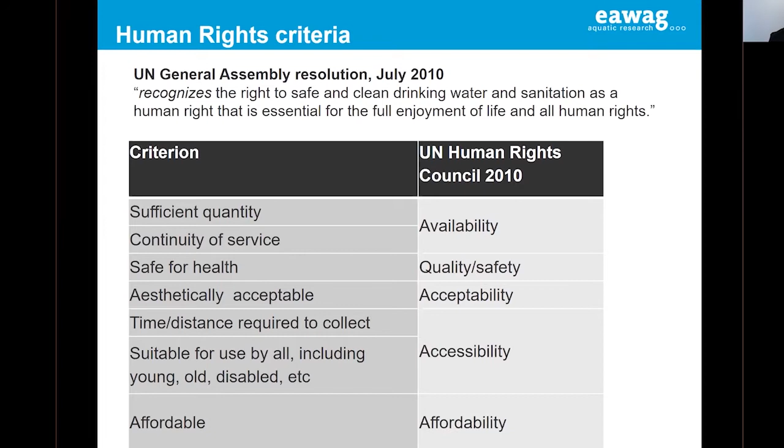The time and the distance required to collect the water have to be adequate. And water has to be accessible also for young people, old people, and disabled people. Last but not least, the price of the water has to be affordable. Those goals are expressed in Sustainable Development Goal 6.1. They claim that by the year 2030, everyone should achieve universal and equitable access to safe and affordable drinking water. This is measured by the indicator of the proportion of the population using safely managed drinking water.

And what does safely managed drinking water mean? This is drinking water from an improved source that is located on the premises, that means in a household compound. It should be available when needed and it should be free from fecal and priority chemical contamination.

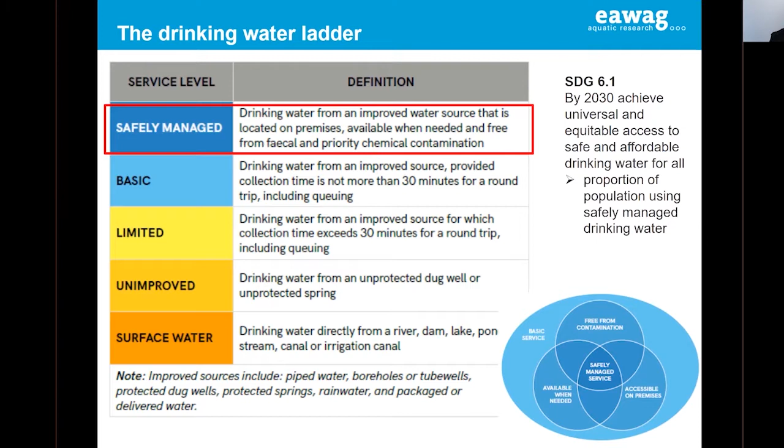The accessibility of water, the distance to the water source, is very crucial because the larger the distance to the source, the less water is being collected. And this has an impact on hygiene because if less water is available, fewer hygienic practices are practiced, which again has an impact on health. Also, the distance to the water source has a strong impact on the health and on the workload of women, usually the ones responsible for collecting and carrying the water. Also, studies have shown that the farther away the source is, the higher the recontamination risk for the water that is being collected at the source.

Diarrhea reduction is associated with an improved drinking water service. While for unimproved water, we cannot expect any reduction of diarrheal diseases, improved water shows that we can reduce diarrhea by about 11%. If improved water is available near the households, in household compounds, we can reduce diarrheal diseases by about 23%. If the water is treated at the household level and if there are safe storage practices, considerable diarrhea reductions can be achieved, up to 48%. If well-managed piped water is delivered into the house, this has an even larger impact on health. Then diarrheal diseases can be reduced by about 75%.

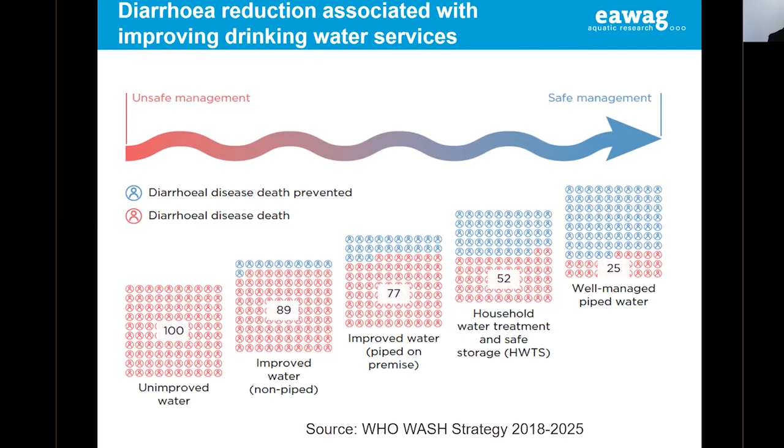I will now present you a video about a water kiosk in Uganda.

More than 1 in 6 people worldwide lack adequate access to clean drinking water. This problem is especially acute in low and middle income countries like Uganda. Currently in Uganda, about 30% of the urban population and 40% of the people in rural areas do not have access to an adequate source of drinking water. In eastern Uganda, there are many groundwater wells in the area, but their water has a high saline content and cannot be used for drinking water. So people are not able to have access to more or less safe water from the ground.

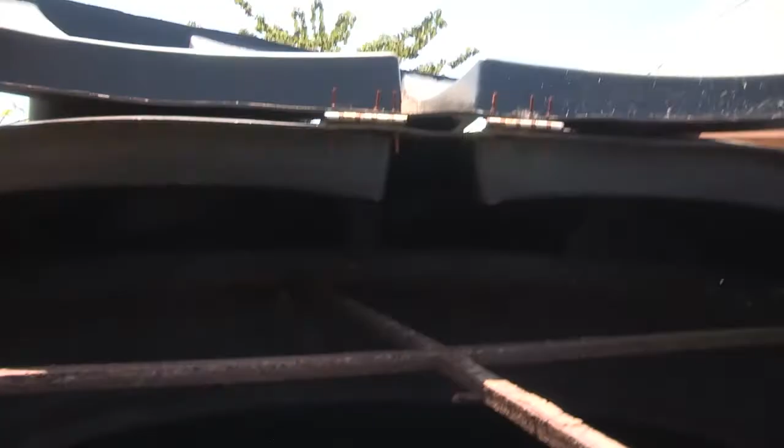So what people do in these times, they just go down to the lake. The majority of people in eastern Uganda get their drinking water from Lake Victoria, which is highly turbid and contaminated. In the past 8 years, scientists at Eawag have developed an innovative technology for water treatment, the gravity-driven membrane filtration.

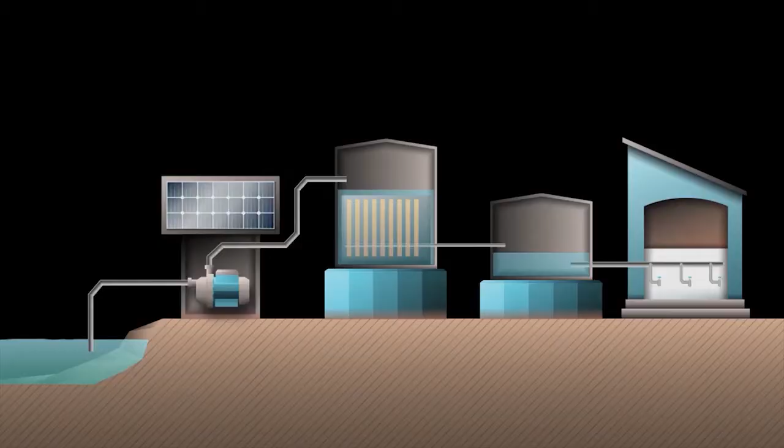We started with the installation of GDM water kiosks in Uganda in 2014. Right now we have established 5 kiosks in Bulwande, Busime, Lugala, Bulundira and Bumeru. The difference between lake water and kiosk water is absolutely immense. And basically the key technology, which is the membrane filtration, is removing particles and it's removing turbidity from the water. This immediately improves the aesthetic quality, so the visual quality of the water.

More importantly, the membranes remove pathogens or microbial contaminants which are in the water. You can think here of protozoa, pathogenic bacteria, worm eggs, anything like this. This is removed. What this does is immediately improve the safety and the hygienic quality of the water, and that gives you a good end water quality at the kiosk.

Each of the kiosks treats about 6,000 liters of water per day, and we serve the schools in those areas as well as the local community. Before this water project came, there were many cases of diarrhea and cholera among other diseases in the communities. But now, the consumption of untreated water from the lake decreased in these locations from 73% to 41%. 59% of the households use the kiosk water.

The incidence of diarrhea among adults has dropped from 19% at the project start to 6%. And among children under the age of 5, it has reduced from 34% to 14%. The incidences of diarrhea and cholera have been reduced. Enhancing access to safe water unlocks opportunities for people by reducing their workload and improving health. The establishment of the GDM water treatment systems at the shore of Lake Victoria is an example of how putting scientific innovation into practice can improve the lives of communities in great need.

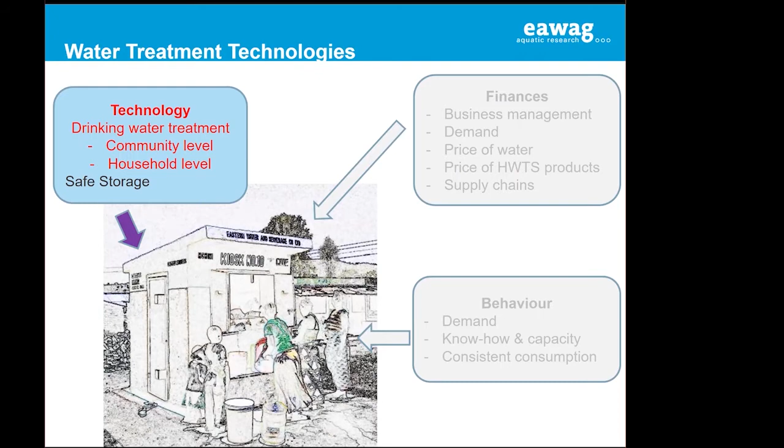So in this chapter, we are going to look at different technologies for drinking water treatment, either at the community level or at the household level. At very different levels, water treatments are possible. There are large-scale centralized systems, usually in urban centers or in peri-urban centers, where a large number of people are supplied by the water. Because risks are very high if there is some contamination in the water and a lot of people are being impacted, there are very high and stringent quality requirements for the water treated.

So the systems being implemented in large-scale centralized systems are usually quite complex technically, and they require quite high cost for investment and operation. Also, because these systems are quite complex, the operation and maintenance procedures are also quite demanding. Usually the responsibility for large-scale systems is with the government or with private companies. Water treatment is also possible at the community level, more in a decentralized manner, and examples for such community-level water treatments are water treatment kiosks.

Here, the systems are usually a bit less complex. Also, a lower number of people are being supplied with the water, and because the systems are less complex, operation and maintenance is easier, and also the costs for the installation of the technologies are lower. Usually these systems are operated by the community, and therefore there is quite a large challenge for establishing the capacity for the community to operate these systems technically.

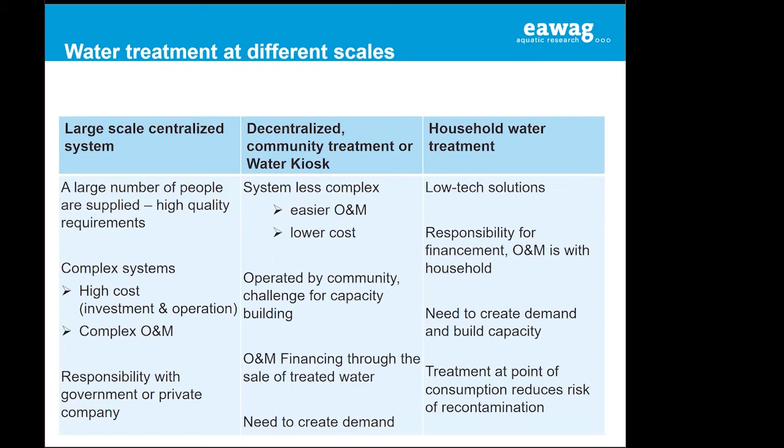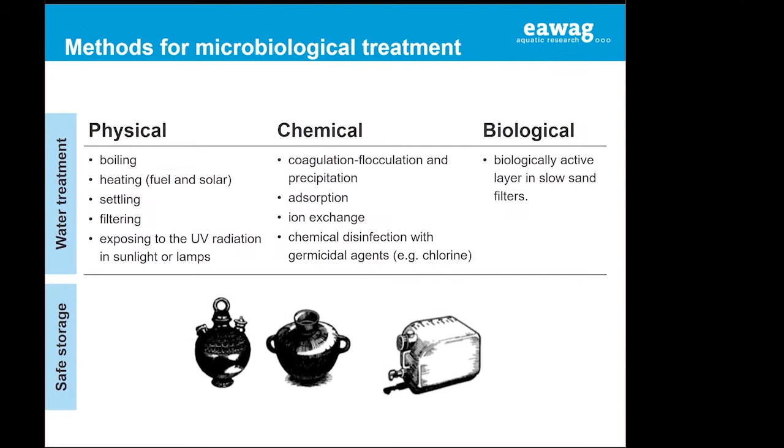As many water treatment technologies are being challenged by turbidity, it's important that turbidity is being removed before water disinfection technologies are being implemented. Why is turbidity challenging water treatments? Turbidity uses up chemical disinfectants dissolved in the water. It causes the premature clogging of filters. It blocks UV radiation and it stimulates bacterial growth. Different methods are being used to reduce turbidity in the water.

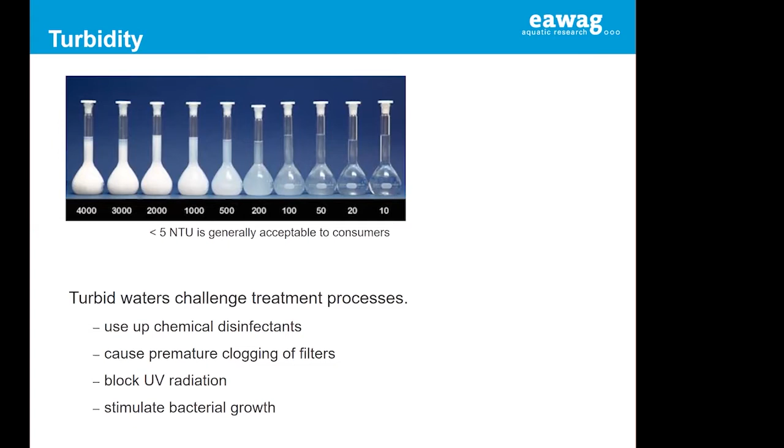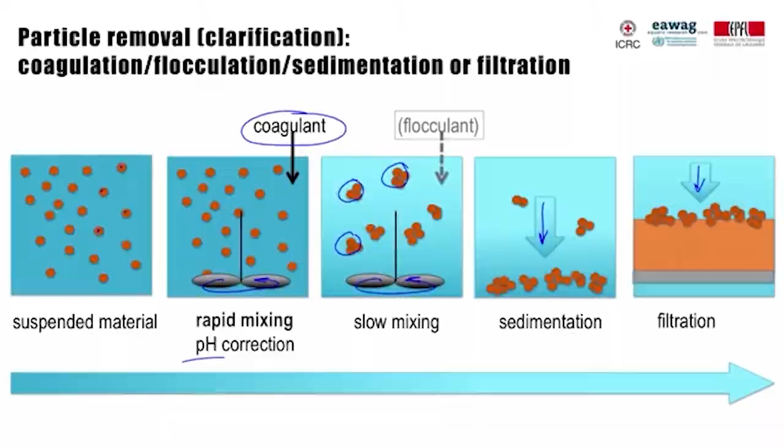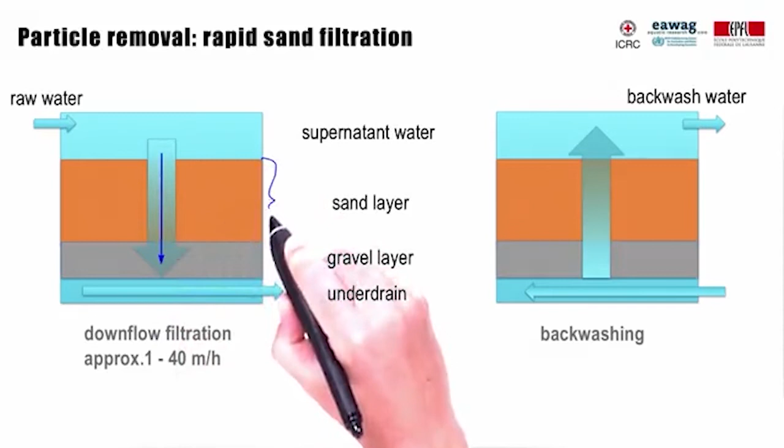Another method of reducing particulate matter content is rapid sand filtration. Water passes through the filter media, which is coarse or medium-sized sand, loaded over the more coarse gravel layer. During filtration, solids get trapped, settle or adsorb onto the sand material. After trapped material accumulates in the first layers, the filter requires backwashing, reverse flow of water to remove accumulated material. The filters are operated at a linear velocity of 1 to 40 meters per hour, which is considerably higher than in slow sand filters, which we discuss later.

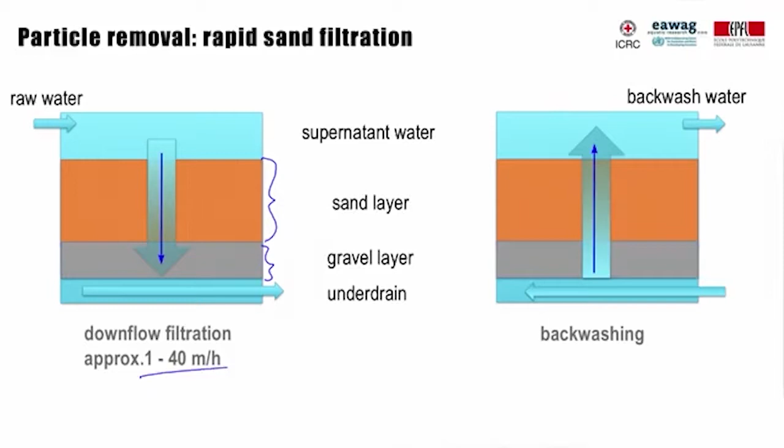For rather turbid waters, roughing filters can be used prior to rapid or slow sand filtration or disinfection. Differently sized coarse material is used in roughing filters. The size decreases in the direction of flow. There are different configurations of roughing filters: upflow, downflow, or horizontal flow. In an upflow filter you see here, water moves from bottom to top and the retained solids accumulate predominantly in the bottom of the filter. They can be flushed out by reversing the flow or simply draining the filter.

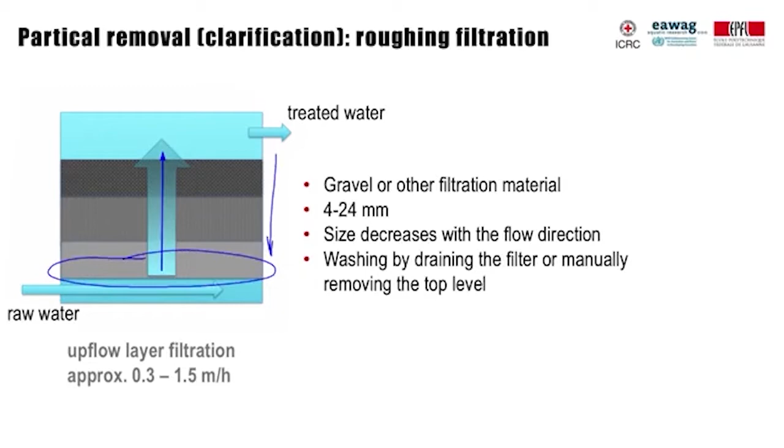Filtration methods are not only available to remove turbidity from the water, but they are also available to remove microbiological or chemical contaminants from the water. One of the options is slow sand filtration, which we will be talking about in the next slides, as well as membrane filtration with different pore sizes, leading to different applications, as well as ceramic filtration, a method which is mainly used at the household level for household water treatment.

Slow sand filters are operated at slow filtration rates of 0.1 to 0.3 meters per hour, compared to rapid sand filters, which are operated at 1 to 40 meters per hour. Slow filtration rates allow development of biological activity within the filter. Thus, slow sand filtration is a combination of different biological and physical processes, including mechanical trapping, adsorption or attachment, predation, and natural death, leading to the reduction of solids but also micro and macroorganisms.

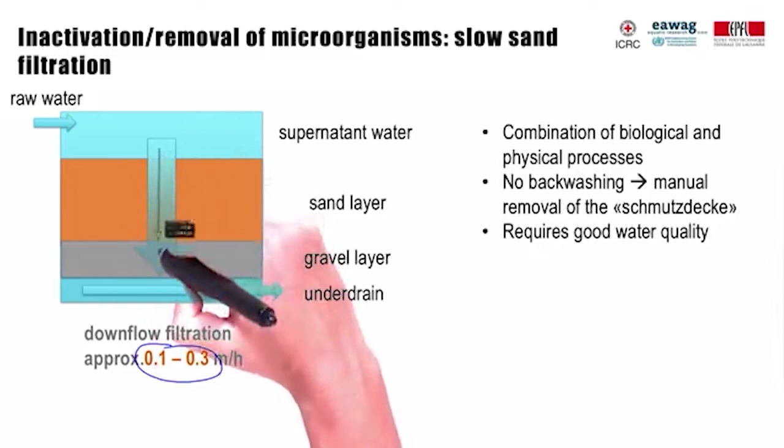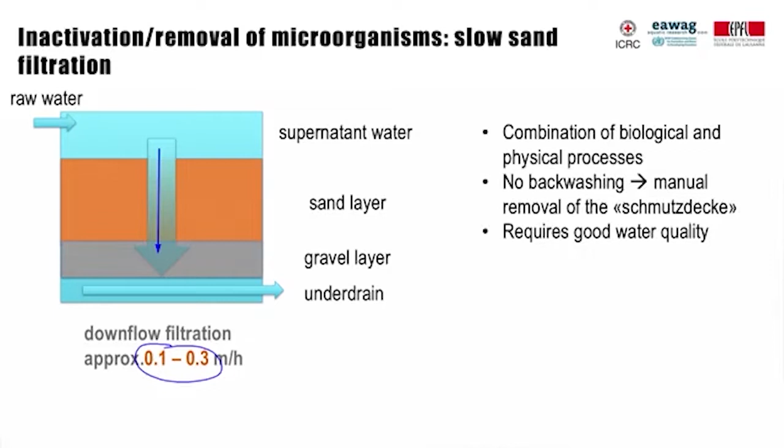Slow sand filters are usually downflow filters and are operated by gravity. Each filter requires a ripening period of a few days to a few weeks until removal rates stabilize. Mainly the top layer of the slow sand filter contains a diverse microbiological community and particles, and it is also called Schmutzdecke. In the Schmutzdecke, predominantly the inactivation of microorganisms occurs.

During membrane filtration, water is driven by the pressure difference between the feed water and filtrate through a filter with pores of a defined size range. Usually polymeric membranes or sometimes ceramic membranes are used. Microfiltration has pores in the size of bacteria or higher and removes them and particulate matter by size exclusion. Ultrafiltration membranes are tighter and also remove viruses, which are in the size of 20 to 80 nanometers.

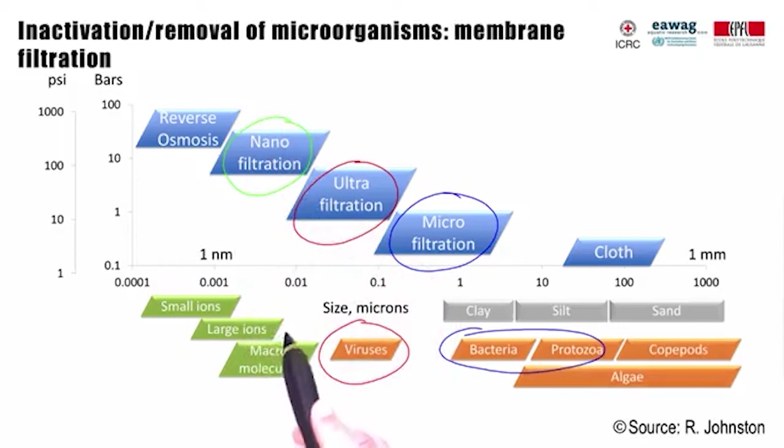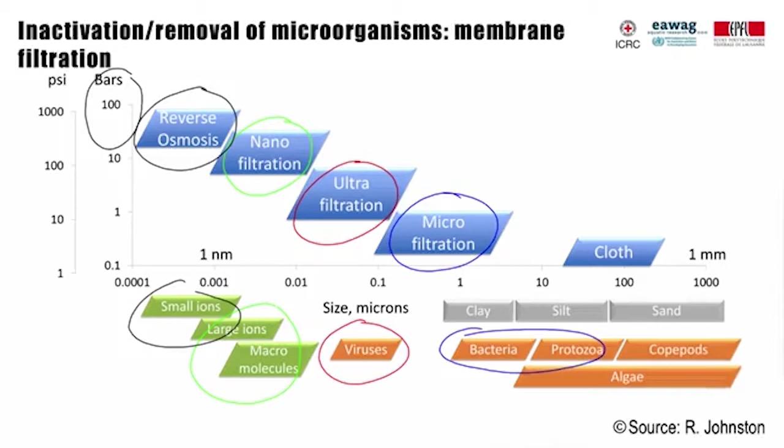Nanofiltration requires considerably higher pressure, as the pores are small, but it is capable of retaining macromolecules and larger ions. Small ions, such as salt ions, can be removed by reverse osmosis, requiring even higher pressure. For disinfection purposes, ultrafiltration membranes are most common as an effective barrier against pathogenic microorganisms, including viruses and particles.

Membranes need to be frequently backwashed to remove larger particles, microorganisms, and all kinds of material accumulating on the surface of the membrane. The layer which is formed on the top of the membrane is called the fouling layer. The drinking water filtration systems offer constant and reliable operation, which however requires a high degree of automation, reliable power supply, and relatively high cost. There are also gravity-driven systems on the market and in development, more suitable for remote applications.

Slow sand filters have the following characteristics. They remove about 1 to 2 log of bacteria and protozoa, but they are also able to remove heavy metals and organic matter. Against viruses, however, they have a limited effectiveness. Advantages of the slow sand filter are, as I mentioned, its removal of organic matter. This is one of the very few water treatment technologies that has the characteristic of removing organic matter.

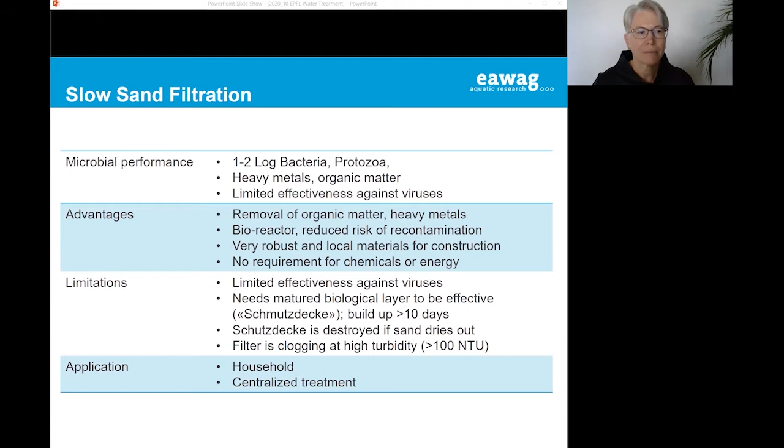Characteristics of membrane filtration, mainly in traditional systems, are that the microbiological performance depends upon the pore size of the membranes, as previously explained. The advantages are that they are highly efficient in removing pathogens, and a lot of water can be treated at once. Also, membrane filters are able to reduce the turbidity of water. But same as with slow sand filters, if water has a very high turbidity, the filters are very quickly clogged. Therefore, turbid water has to be pre-treated.

Limitations are fouling of membranes. That means that the membranes have to be regularly backflushed and they have to be disinfected chemically. So these are complex systems, they are usually very costly, and they have to be imported in areas of low-income countries. Also, supply chains are required for replacement parts. And in the case of reverse osmosis systems, it's difficult to discharge the brine. For all those treatment technologies, recontamination during storage is a risk.

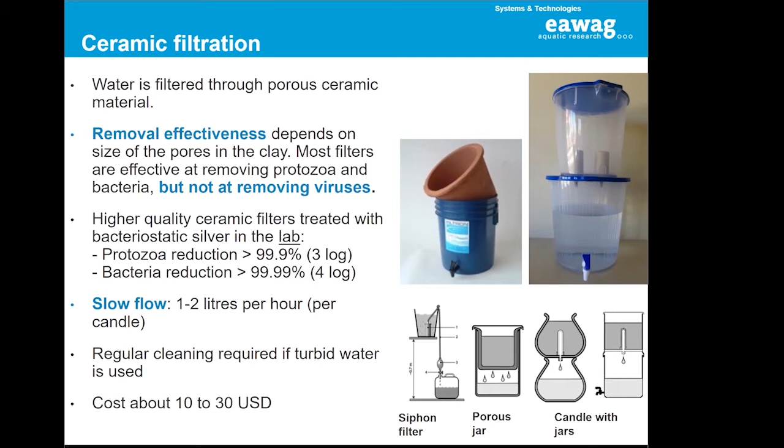Now I would like to introduce you to an example of marketing ceramic filters in Cambodia. This is the Tunsai ceramic filter, which has been developed by the organization Hydrologic Social Enterprise. And as you can see from the picture here, we have two types of filters: the normal filter, the Tunsai filter, and then an improved model, the Super Tunsai filter, with a better design that has some filter stands that enable you to better withdraw the water and put the glass below it. The Tunsai costs $12 and the Super Tunsai costs $22 US.

Now, these filters have been marketed by two different approaches: direct sales and sales through microfinance groups. In the microfinance groups, women had the opportunity to obtain loans, and these loans facilitated the performance of the sales model. So the result of this marketing experiment was that direct sales led to about 16% of households purchasing filters, whereas in the microfinance groups, about 43% of the members purchased a filter.

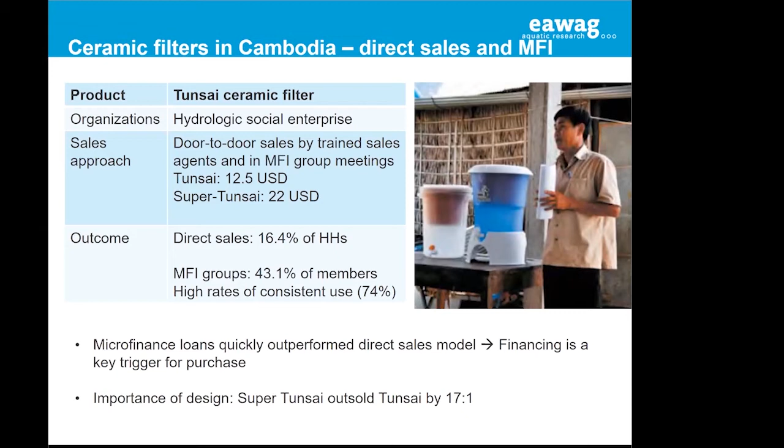So another method for household water treatment is boiling. Boiling is the method which is most broadly applied in low-income countries, especially in Asia. It is a very old method. It has been recommended by health workers for centuries. And of course, boiling is never applied at the centralized scale, only at the household scale.

So the problem with boiling is that it uses a lot of energy. And there have been some calculations that said that the household cost could increase by about 10% only for the cost of boiling the water if additional fuel needs to be used. Also, a problem is if the boiled water is not stored properly, because if it's stored in unclean containers, of course, the boiled water can be recontaminated again.

One of the big advantages of boiling is that it disinfects almost all pathogens. Only very, very few spores, like for example anthrax spores, are resistant to boiling. So boiling is one of the few methods that can be used to disinfect all the pathogens.

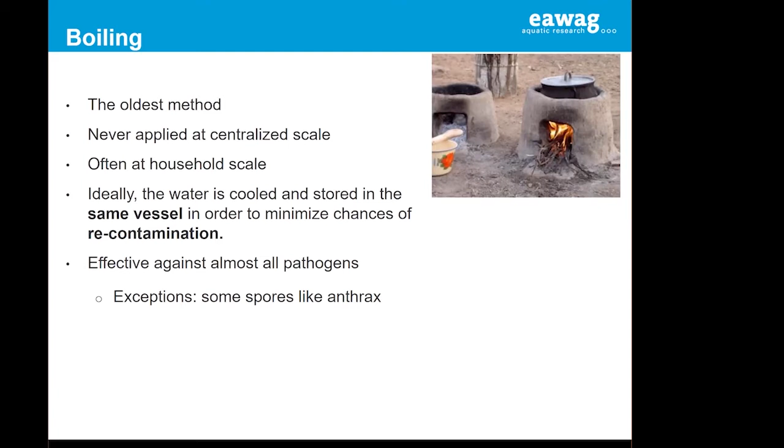Now, a question is, how long should water be boiled for the water to be safe? And here we come to pasteurization, because actually water does not have to be boiled at all to disinfect the water. We can use the pasteurization effect, and heating up the water to 70 degrees Celsius for a few minutes has quasi the same effect as boiling. And this table gives you an indication of the temperature sensitivity of different pathogens.

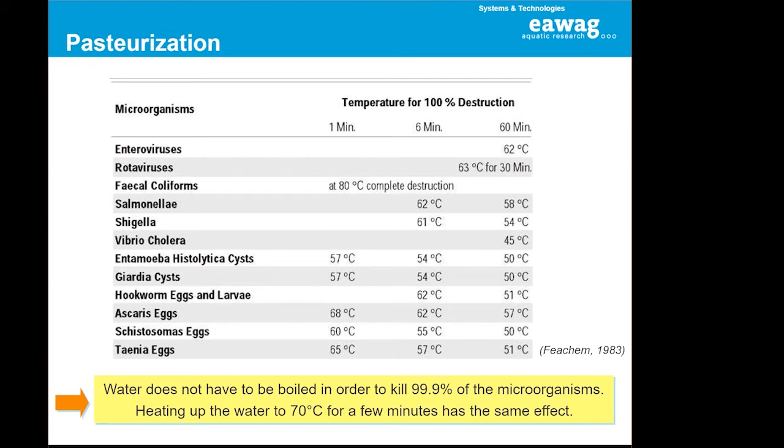So if we summarize the characterization of boiling and pasteurization, we have a high efficiency against different classes of pathogens, and it's a very common technology which can be combined with cooking or with tea boiling. Also, one of the big advantages of boiling is that it's one of the few technologies that can be used to treat turbid water. Limitations are the possibility for recontamination, the very high cost for fuel, indoor air pollution, and also boiling can be quite time-consuming. Regarding the application, boiling is only applied at the household level.

UVC radiation has been used for a long time for water disinfection. UVC irradiation is another method for drinking water treatment. The germicidal activity of UVC radiation in the wavelength between 200 and 280 nanometers has been used for water disinfection since the early 20th century. UVC radiation is also very effective in disinfecting the water.

Bacteria, Cryptosporidium and Giardia are disinfected at doses between 1 to 10 millijoules per square centimeter, whereas viruses and bacterial spores need a bit higher irradiation intensity of about 30 to 150 millijoules per square centimeter.

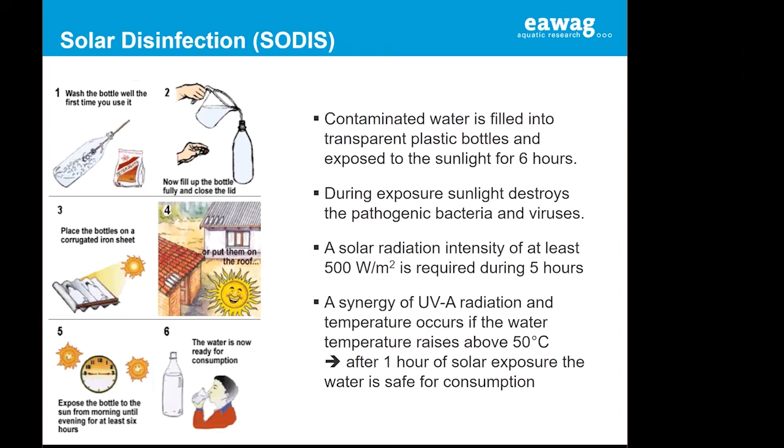During the sunlight exposure, the sunlight destroys the bacteria and the viruses. Virus inactivation is about 1 log, while bacteria inactivation is about 3 log. A solar irradiation intensity of about 500 watts per square meter is required during 5 hours on a sunny day. But if the water temperature increases above 50 degrees Celsius, there is a synergy of UVA radiation and the temperature, and only about 1 hour of solar exposure is required for the water to be safe for consumption.

Summarizing advantages and limitations, we have a microbiological performance to inactivate bacteria of about 3 log, and a limited effectiveness against protozoa and viruses. Protozoa are very easily disinfected if the water temperature increases above 50 degrees Celsius, and the inactivation of viruses is about 90%. The advantages of this method are that it uses local, very low-cost materials, such as the sunlight and locally available PET bottles. The method is very low-cost, and it doesn't change the taste of the water. Also, if the treated water is stored in bottles, recontamination of the water is very unlikely.

Limitations are that highly turbid water needs a pre-treatment. Then the method is highly dependent upon the weather. In areas where you have a lot of fog or very frequent rains, the method is just not suitable. Also, the long treatment time, so you have to expose the water to the sun for some hours, up to 2 days, and only limited volumes of water can be treated. Also, a limitation is that quite a large supply of clean, intact, and properly sized bottles is needed. And this is a challenge because not everywhere in low-income areas is such a large amount of reused bottles available. Of course, this method is also only applicable at the household level.

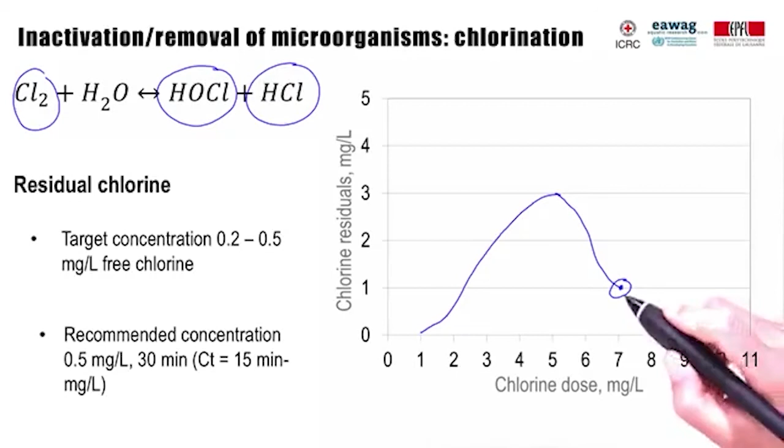Breakpoint is the point at which complete oxidation of all chloramine species has occurred. The location of this point depends on the presence of organic matter, nitrogen, and reduced inorganic ions. After the breakpoint is reached, free chlorine residual proportionally increases with the chlorine dose. The part of chlorine which participates in disinfection is called chlorine demand.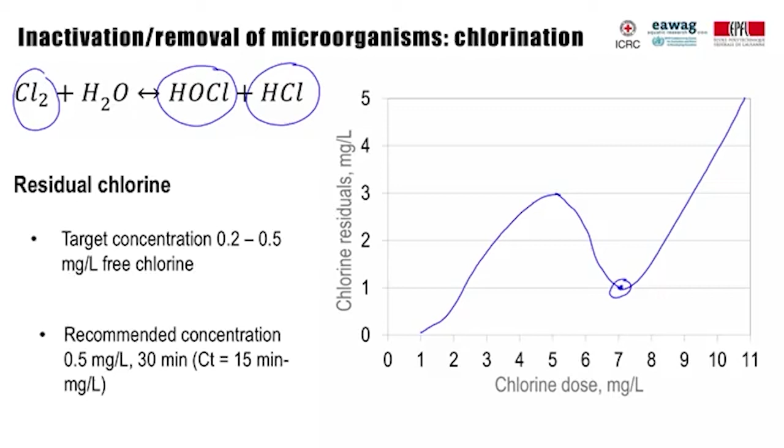Chlorine residual is the chlorine which remains in water after the disinfection process has been predominantly completed and acts as a safeguard against additional microbial contamination that could be introduced in water or in the distribution network at the point of use. Recommended residual chlorine concentration is about 0.5 mg per liter of free chlorine, which should be applied to water during at least 30 minutes. Chlorine dose is expressed as concentration multiplied by contact time, called the CT value.

CT99 means the concentration and time required to kill 99% of target microorganisms. In case of bacteria, the CT values are low, indicating the inactivation of bacteria occurs relatively fast and at low concentration. The time and concentration are considerably higher to inactivate viruses and very high for protozoa.

Cryptosporidium oocysts are resistant to chlorine, which often does not provide sufficient level of inactivation to protect from a disease. Presence of particulate matter in water leading to high turbidity of water compromises chlorination, and water has to be clarified before it can be disinfected with chlorine.

There are different forms of chlorine available, and it can even be produced on site by electrolysis of salt and water. The choice of the most appropriate form of chlorine will depend on such factors as scale and water volume which needs to be treated, skills available, safety management practices, and power supply reliability.

Ozone is a highly effective oxidant, not only disinfecting water, but also reducing color, micropollutant content, and other organic contamination. It is, however, expensive and doesn't provide residual protection. Due to high cost and relative complexity, it is usually not used in an emergency context.

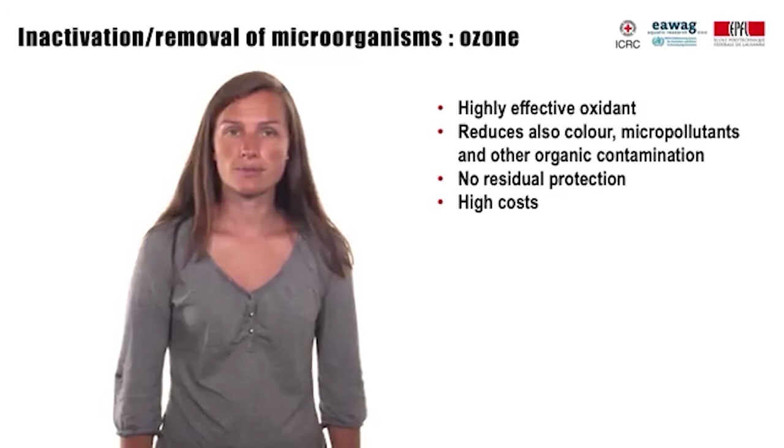Summarizing on chlorine disinfection. With chlorine, we can remove about 2 log of bacteria and also viruses, but the method is not so effective against protozoa and cysts, especially against Cryptosporidium. This can be a problem if we have a project or if we work in an area where there are living people with a compromised immune system, or also if we treat water for small children. There we have to assure that also the protozoa are being removed by the method that we are using.

The biggest advantage of chlorine disinfection is that it provides a residual protection against recontamination. The method is quite simple to use and local production is possible. Also, there are household applications which are being provided at very low cost. Chlorine does not work well if the water is turbid because organic material dissolved in the water reacts with free chlorine. Therefore, turbid water needs to be pre-treated.

Also, chlorination changes the taste of the water, and this could lead to rejection among the community that receives chlorinated water. Also, dosage depends upon the raw water quality, and therefore it's not always easy to determine the appropriate dosage for water. There is a contact time required for the chemicals to react, which is 30 minutes. Chlorination is being applied at the household level, but also in centralized water treatment plants at the community scale as well as at the centralized scale.

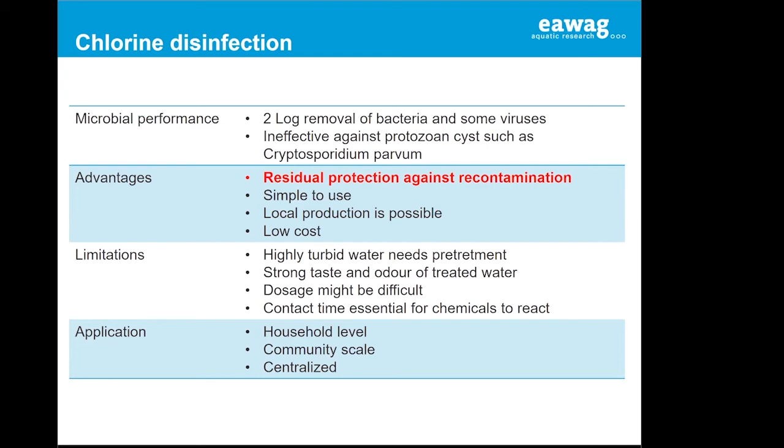I would like to present you an example of the application of chlorine in a low-income country context. The chlorine dispenser has been developed by the organization Innovations for Poverty Action. The chlorine dispenser is a bucket containing liquid chlorine, which is installed near the source of water, where people collect their water in jerry cans. The chlorine dispenser has a valve that doses the required amount of chlorine for a 20-liter bucket.

When people collect their water at the source, they usually pay for the water, and a very little amount for the added cost of chlorine is added to that water price. An evaluation has shown that about 50 to 61% of the people use the chlorine dispenser regularly, compared to 6 to 14% in a control group that did use chlorine at the household level, but not taking the chlorine from a chlorine dispenser attached to the source. Also, the evaluation showed that the chlorine dispensers were still used after 2 years.

Other products for chlorination at the household level are the safe water system, which contains liquid chlorine, which is produced locally, and a container for safe storage. This product is marketed at very low price and makes the chlorine available for household water treatment. Another product for household water treatment using chlorine are Aquatabs, and they use sodium dichloroisocyanurate. The advantage of Aquatabs is that they have a longer shelf life than liquid chlorine of about 5 years. Therefore, the product is often applied in emergency contexts.

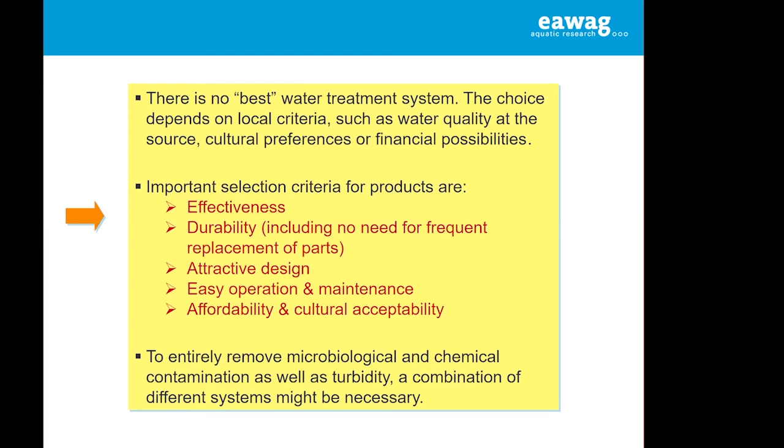So, in addition to water treatment technology, we have a challenge that water might get recontaminated if it is collected at the tap or at the source. Therefore, interventions to assure safe storage are very important.

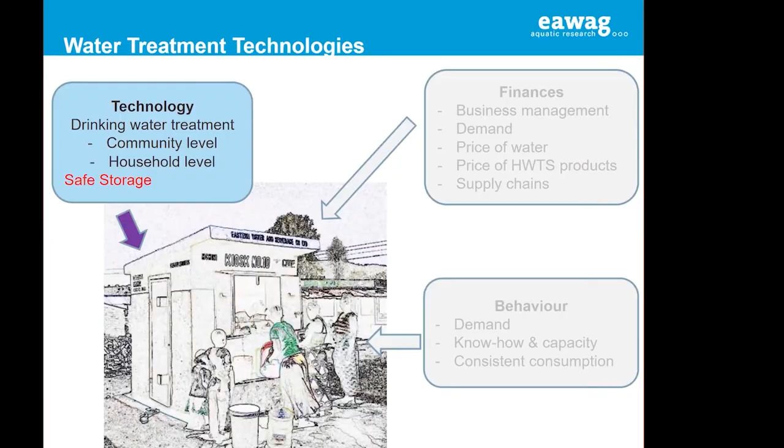Safe storage of drinking water can help to minimize such contamination risks during collection and transport, when the source is outside the home, as well as during household storage. Especially when water is treated at the household level, it's very important to store it properly so that the gains in quality are not lost.

There are a number of characteristics we would like to see in an ideal household storage container. Perhaps the most important one is that the container should be covered and that there should be an opening which is small enough to discourage people from putting their hands into the container during water collection or from using a scoop or ladle to retrieve stored water.

The opening, however, should be large enough to allow easy filling at the point of collection, and usually openings are between 5 and 8 centimeters in diameter, and ideally they have a screw cap of some kind. Although you don't want it to be too easy to insert hands into the container, it is good if the container can be cleaned periodically. And in some designs, a lid can be removed and the insides can be cleaned manually.

Where this isn't possible, users are recommended to periodically add sand or pebbles and shake them about to clean the insides. You can also add soap or chlorine after removing the pebbles to wash the insides of the container.

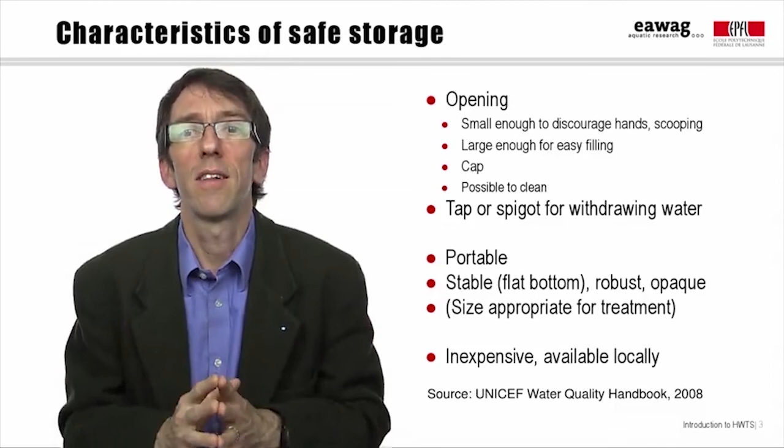The Oxfam bucket has a lid with an opening and cap built in, and the cap is attached so you can't lose it. You can also completely remove the lid, which allows very efficient transport since the buckets can be stacked inside each other. These also cost around $4 or $5, and while they were designed at Oxfam in the UK, they're now produced all around the world.

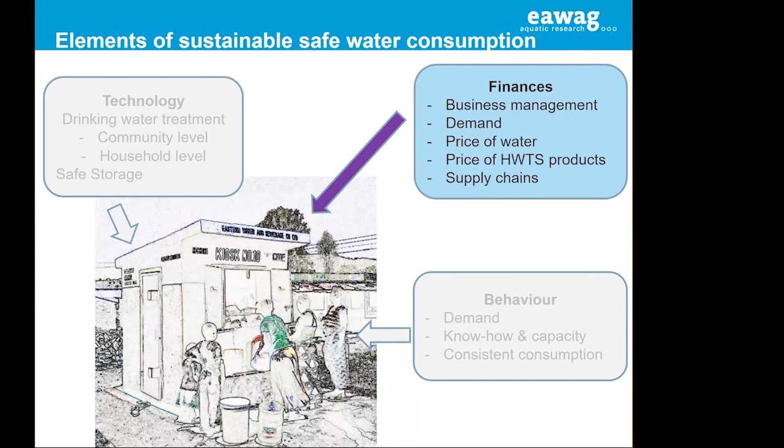Going back to the business management of water kiosks, the ownership model can play a very important role for the functioning or not functioning of such a kiosk. A kiosk could be managed by a community committee comprising different people, but the question is, can such an ownership model work well? Sometimes there are disputes or disagreements between different members of the groups.

So a community kiosk is not the only option for running such a kiosk. There could be a franchise model, or it would also be possible to run such a kiosk as a private enterprise. Looking at such a kiosk, we need to think about financing of investment costs. And there has been quite some research looking at income generation and cost of such kiosks. And very rarely is such a kiosk able to recover financing investments because the revenues being generated by such a kiosk are extremely low. But the kiosks may be able to generate sufficient revenues to finance operation and maintenance.

A very crucial element to generate sufficient income is demand. How many people are actually coming to the kiosk to buy the treated water? It is a very important element of income. How can people be convinced to come to the kiosks? So there needs to be PR, public relations activities, and there needs to be community training and education to increase demand.

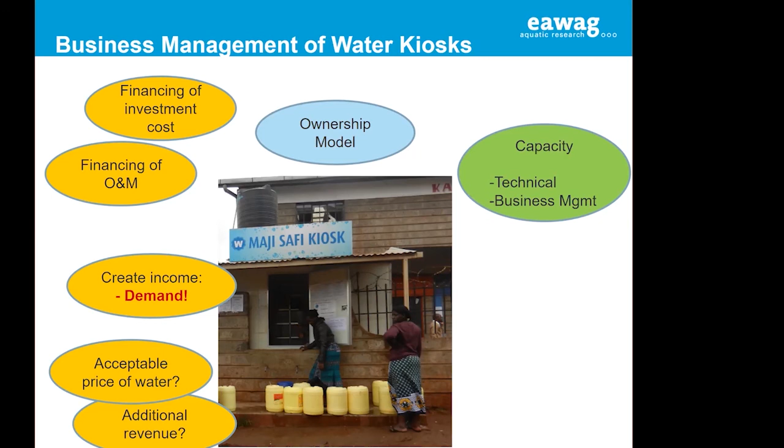So if we look at business model approaches of water kiosks, we have the different ownership models. Then we have different key activities looking at the value proposition. That means activities that generate an income. We need to look at customer relations and marketing, and that looks into community training, behavior change to increase demand, then the branding of the kiosk.

We need to look at how many customers such a kiosk has, and the number of customers is influenced by the population density. We have to look at competition. Are there other water sources around where people are maybe able to go to a river and collect water for free, which is not safe, but doesn't cost anything? We have to look at the behavior factors.

Then we have to look at key resources in the model. That means what kind of technology is being used, what are the management requirements, what are operation and maintenance capacities and capabilities. Then we need to look at the cost structure. What are the capex? How can this investment be generated?

Are there any donors around that are willing to invest into a kiosk without expecting to have the investment back? What are the operation expenditures, salaries? What are costs for maintenance? What are costs for electricity, for example, to operate pumps? And what is the revenue structure for such a kiosk?

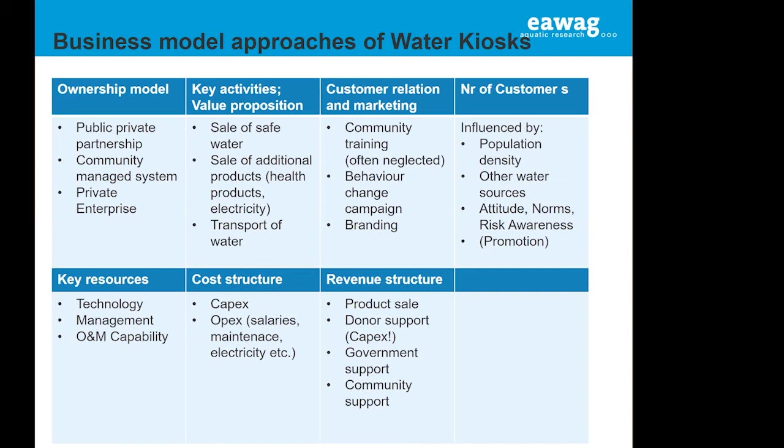The price of water at the household water kiosk, or the price for household water treatment products, is very crucial. And why is that so? About 4 billion people in the world live at the bottom of the economic pyramid. Those people have an income of less than $1,500 per year. Among those, the poorest of the poor, 1 billion people, they earn less than $1 per day. Looking at this, price has a very crucial impact on the uptake of a behavior or a treatment method.

If we look at experiments that were conducted by Poverty Action Lab to assess the price's effect on the use of health products, for example, deworming tablets in Kenya, bed nets, or water disinfectant or soap, we see that a small fee causes a very, very big reduction in the take-up of those health products. If we look at such high impacts of price or increases, we have to think of potential subsidies for health products, which could be carried by the government in the interest of a public health effect.

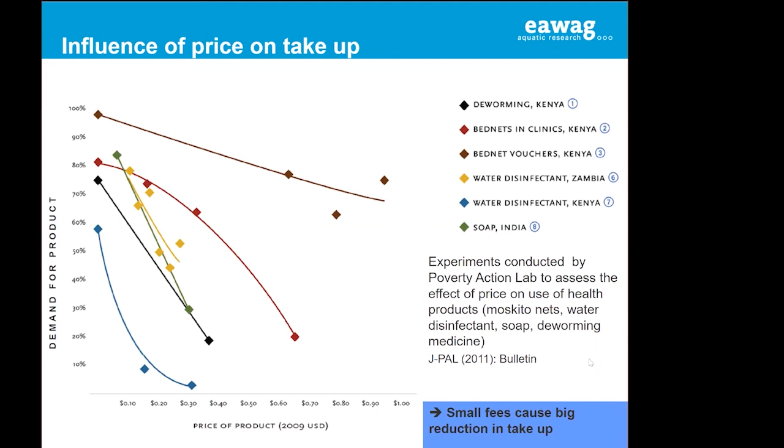So, looking at affordability, what does this mean for households? Affordability is one of the criteria for access to safe drinking water as defined by the Sustainable Development Goals. And an independent human rights expert defined optimal affordability as overall water costs of less than 3% of the household budget. Intermediate affordability is at 5% and minimal affordability is at 7% of the household budget.

What does this mean for payment schemes regarding household water treatment products? We have the option of direct purchase of such products from shops. This is being applied in the case of cheap products and particularly fast-moving goods, such as, for example, chlorine liquid drops. But there are also options for paying products in installments if it concerns higher-priced products, such as, for example, filters. For filters also, we have seen from the example in Cambodia that filters can be purchased through microcredit.

Also, we have to think about the option of a subsidy for a health product. However, the option of subsidy only works if we have a scheme that provides a long-term subsidy, because the application of subsidies can be dangerous. If a product gets damaged and replacement parts have to be purchased, or if the product has to be replaced, it's not very likely that households are going to buy a new product for a full price if a subsidy is not available anymore.

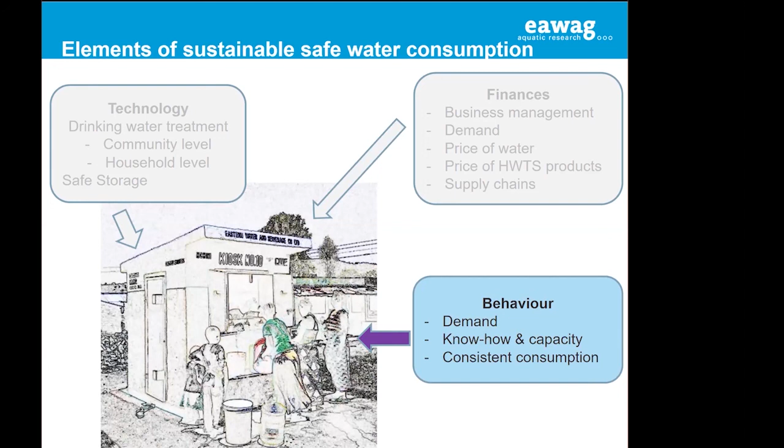So we have looked at the elements of technology and the element of finances to establish sustainable safe water consumption. And I have pointed out that behavior change and behavior change interventions are very important to increase demand for such products and also to establish consistent consumption of safe water. Such behavior change is important and consistent consumption is important to realize the health benefits.